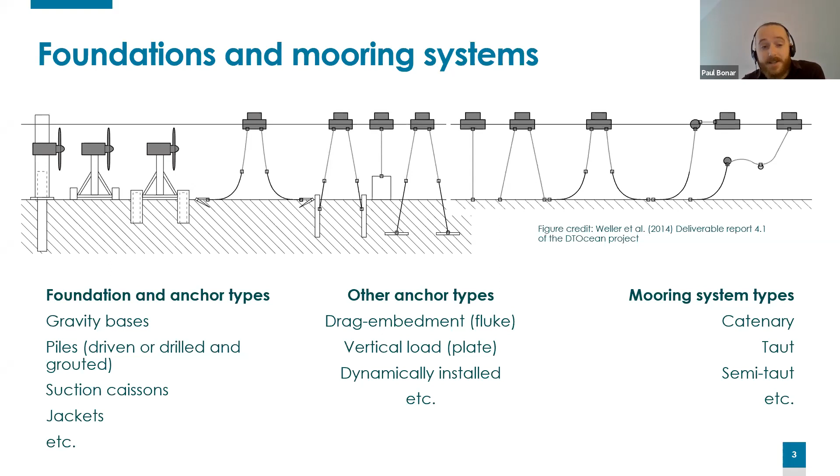The choice of station keeping system depends on the characteristics of the structure and the deployment location. But the idea is that each system will be designed to secure the structure or device in a way that's reliable and cost effective. That being said, most marine energy devices have been secured with heavy gravity bases because at demonstration stage, designers typically favor simplicity and reliability over cost efficiency.

Now let's have a look at some of the key challenges in designing foundations and moorings for marine energy devices. I'm sure you can all think of some, but the first one that comes to my mind is the marine environment, which is extremely challenging for both engineering design and marine operations. For marine energy, we're often targeting some of the most extreme environments, and we're doing so with new types of technology and limited operational experience, all of which can introduce risk and increase cost.

With these sorts of challenges, it makes sense to try and learn as much as we can from the offshore oil and gas sectors, which have decades worth of experience in securing structures to the seabed. As TJ mentioned earlier, oil and gas standards have proven a useful starting point for marine energy, but their priorities are quite different. I know my colleague Kate will touch on this in her talk as well, but I just wanted to introduce some of these key differences.

In oil and gas, the structures are usually much larger, they have crew working on them, and they generate so much revenue that the cost of a station keeping system is proportionally very small. For marine energy devices, on the other hand, they're usually much smaller, they're unmanned generally, and instead of having a single high value asset, you might have arrays of devices, each with their own substructure, and so the foundation and mooring costs could be proportionally much higher.

Marine energy devices might also have longer design lives. They can be subject to more complex loading. And rather than keep the device still, the moorings might be required to allow it to move in certain ways and by certain amounts as it generates power.

Some of the other challenges include the fact that there is no consensus as to the best type of marine energy device. At one time, there may have been an expectation that one particular type would be by far the most successful, but the view now is that there could be a number of different devices to choose from depending on the situation. Wave devices come in many different forms, as we know.

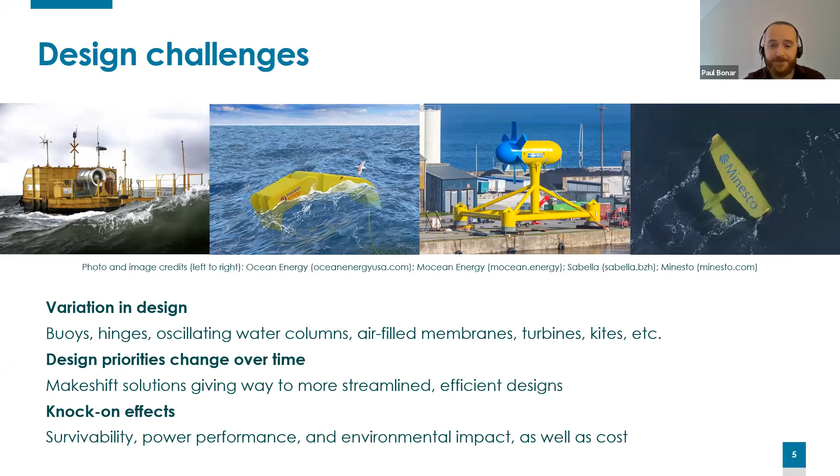With all these challenges, you might wonder how the marine energy industries are planning to proceed. Experts recommend a learning by doing approach, where good practices are adopted from other sectors, bespoke methods and tools are developed, and experiences are documented and shared. It's on these bespoke methods and tools that the SELKIE project comes in. Our project is developing open source methods and tools in key technology areas to support the marine energy industries, and also providing networking opportunities for SMEs and supply chain companies.

For station keeping systems, the key challenge at the moment is cost. Foundations and moorings are often quoted as representing between 10 and 30% of the installed cost for marine energy, but any additional cost or saving also has knock-on effects for installation, O&M, and so on. So as you can imagine, there's been a lot of research activity in this area.

These projects have really set the standard for open source decision support tools for marine energy. We're in a good position to learn from them because their second project is beginning to wind down just as ours is starting to spin up. My colleague Majid will give some more detail on the DTOcean tool in just a few minutes, but I wanted to briefly introduce how it works.

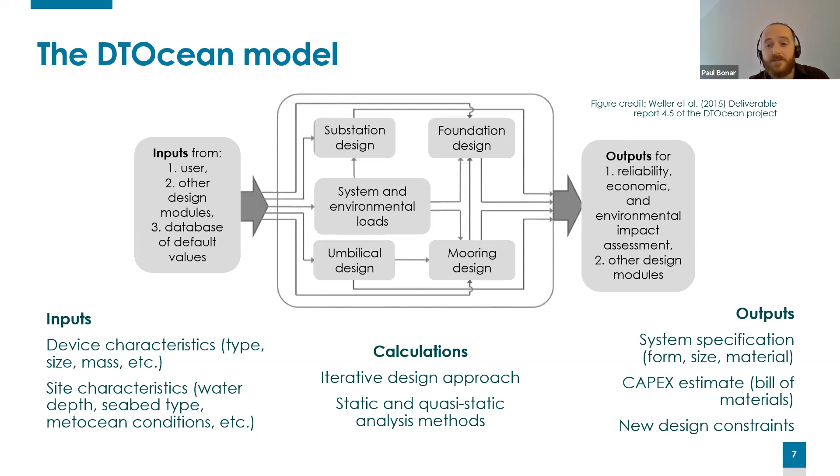First and most important, we've got usability. Making the tool simple and intuitive to use is obviously key, and we think that a link to the web-based GIS tool that our partners at UCC are developing, the one that TJ mentioned earlier, could be really helpful for us.

Flexibility is important too. We'd like to ensure that our tool can be used for different technologies at different levels of complexity and allow users some flexibility in the design to play around with safety factors and that kind of thing. Transparency is also key.

If we're going to suggest that one particular system type is best, we'd like to be able to show our work and give our users the final say on that. Compatibility as well - like DTOcean, we want to ensure that the outputs from our tool can be taken and plugged into other design tools. And then finally, we've got enhancement - where possible, we're going to try and include the latest technologies and methods to give the user the benefit of some more recent advances in station keeping system design.

We've also included some of the key questions in the Menti survey that TJ has shared. So we want to know which industries and sectors you're working in, which design software you use, if your methods already include open source tools, and if so, which ones. If you use the DTOcean tools specifically, and also what you think will be the next big innovations in foundation and mooring design.

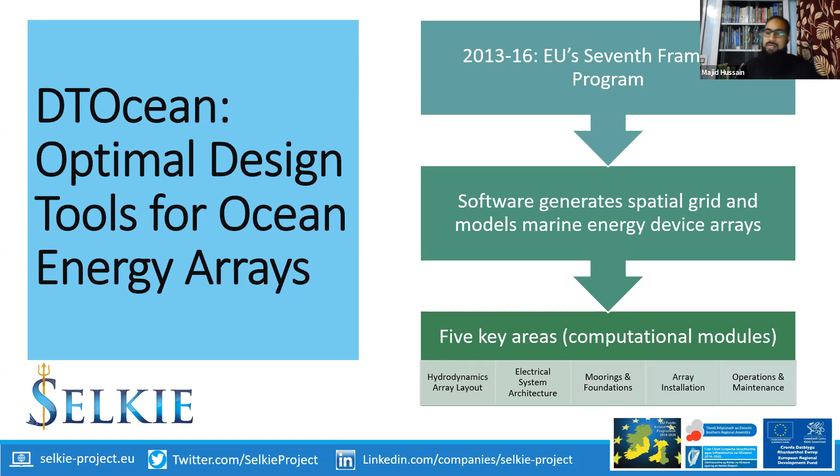So there are basically 5 key computational areas. One is hydrodynamics, then we have electrical system architecture, then we have moorings and foundations, which we'll be discussing in this part, then array installation and O&M.

Now, if we look at DTOcean, after a set of inputs - which is based on the technology type, deployment location, and also on the user-defined inputs - the output or the assessment that comes out is basically in terms of economics, reliability, and environmental impact assessment.

So if we look at work package 4 of DTOcean, which was concerned with moorings and foundation design, the set of inputs that goes into the software includes user-defined inputs and also inputs from the other packages. From these packages, the output serves as an input to work package 4, including array layout, umbilical modules, and also inputs from the global tool database.

Within work package 5, the capital cost, installation, operation, and maintenance are minimized. After minimizing that, the reliability of the solution is computed, calculated from the component failure rates. When that passes, then we have the environmental impact assessment.

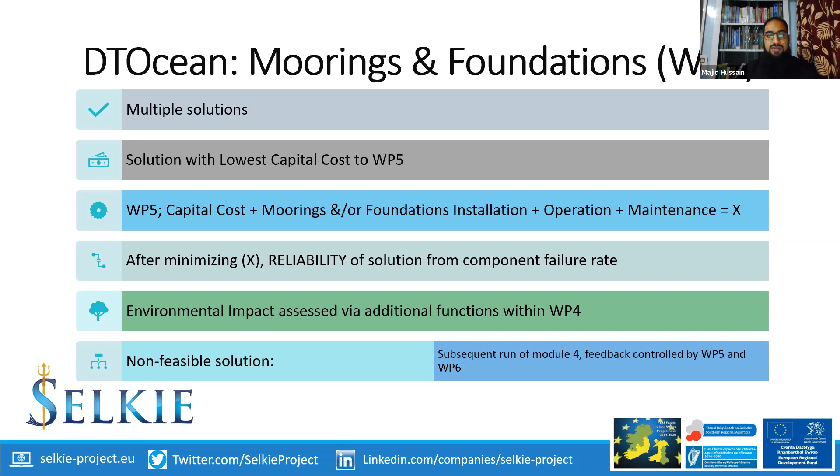Now if we look at the high-level data flow within work package 4, we can see the inputs coming from the user, and also from other work packages and the database. Then it goes within the submodules - actually 5 submodules are interlinked there. After processing, depending on the technology type and the seabed conditions, we have output in terms of economics, reliability, and environmental impact.

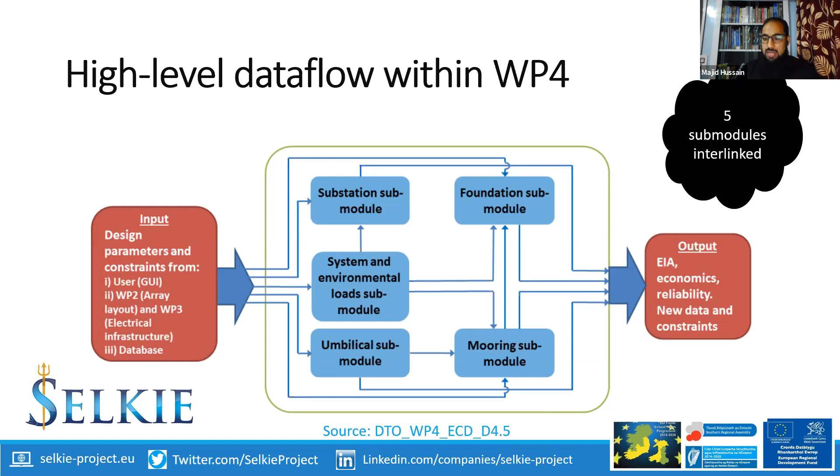Now we have two types of systems. One, if we look at the floating system, we can see the output from the loading, that is system and environmental, is stopped from going into the foundation module because it is floating. So it will be mostly mooring lines anchored to the seabed. From the mooring lines, the loads go to the foundation submodule to design or identify what type of anchors will be used.

Now if we look at the fixed system, the foundation submodule comes into action, particularly taking input from the substation module, also system and environmental loads. In this case, the output can be pile or caisson, but the main output from work package 4 and overall DTOcean will be economics, reliability, and environmental impact.

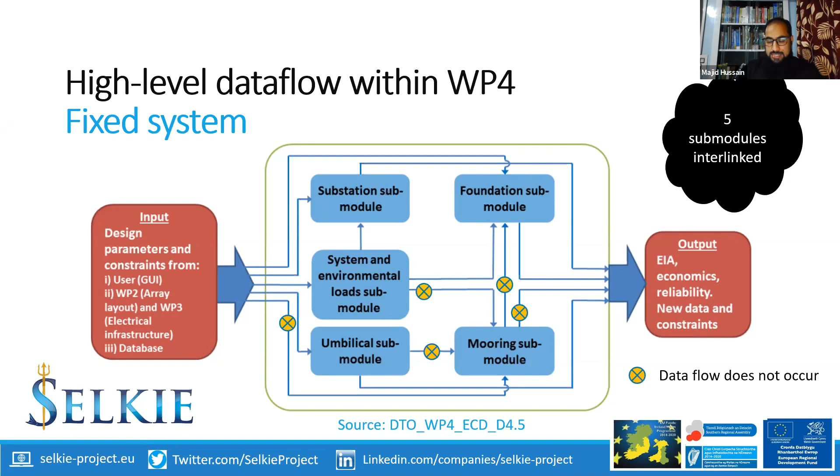Now if we look at the standards and methods that have been considered by DTOcean, they are pretty much the same as for all offshore devices or structures. The limit states considered by DTOcean are ultimate limit state and accidental limit state only. Maybe in DTOcean Plus, which is coming next year, they will take the dynamic part into account also.

Regarding the uncertainty of the materials and loads, that has been taken care of by the safety level or safety factor. It depends on the risk or effect that a failure entails. So if the failure produces a very high risk, like to the life of the operators or something, then we have to keep the safety level high.

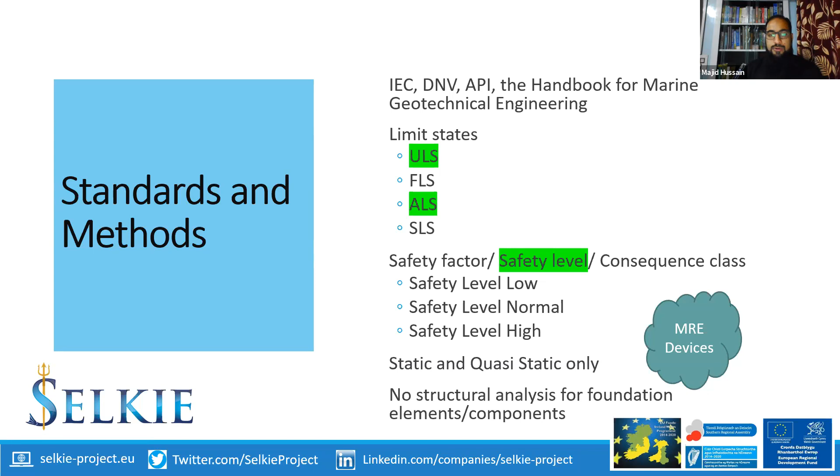Regarding the analysis, as Paul was mentioning, it will be static and quasi-static only. There is no dynamic analysis, which would include frequency domain and time domain analysis. Also, after the output, there is no structural analysis for foundation elements or components in DTOcean. Maybe there will be something in DTOcean Plus.

Now if we look at the DTOcean output, for work package 4 it is basically configuration hierarchy and configuration bill of materials. This goes as an input to work package 5 to plan the logistics, and work package 6 to plan the reliability.

So the overall solution will be refined further by work package 5 and work package 6. And after that, the final assessment we will have in terms of LCOE, reliability, and environmental impact.

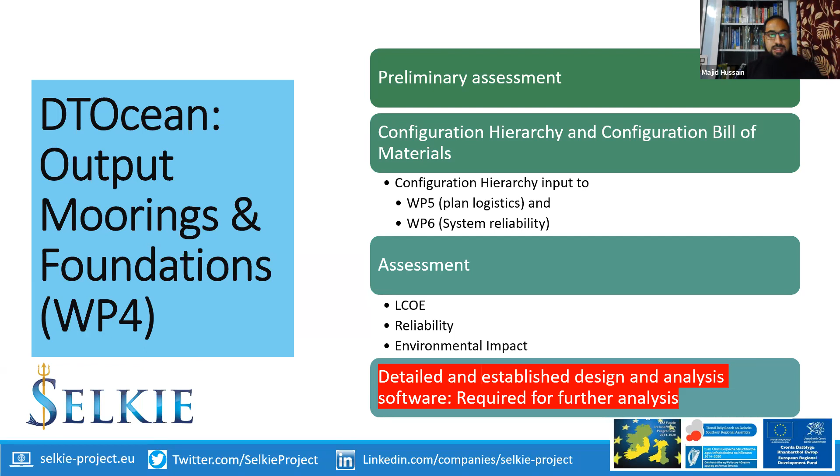For this, there are many commercial softwares available, and we'll discuss here SESAM, though there are others like Abaqus as well. SESAM has been there for pretty much time, around 60 years now. It was actually designed for the hydrodynamic and structural analysis of ships and other offshore structures.

In SESAM, the simulations are done in a highly relatable environment, where analysis during conceptual design involves natural frequency analysis, as well as ultimate limit state, serviceability limit state, and fatigue limit state.

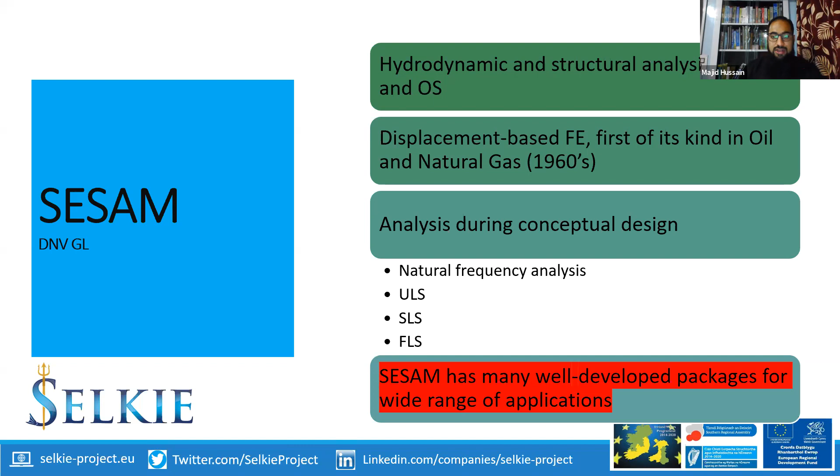SESAM has developed over the past 60 years with experience, and as you can see it's updated every now and then, and it has well-developed packages for a wide range of applications.

So there is SESAM for offshore wind, for floating structures, and to our particular interest for work package 5 in our SELKIE project, that is for moorings and foundations. We have SESAM for mooring and risers, and then there's a SESAM module for floating offshore wind turbines.

SESAM for mooring and risers has further subtools within it that do different tasks, like DeepC is there, FE Corrosion, which takes care of the corrosion of the mooring lines or other components, and SIMA is there. So there are many subtools within the system for moorings and risers that do analysis for different tasks and give us an output.

So this is a very high level introduction to this, and many details can be found at www.dnvgl.com, so you can go there. For our work package 5 of the SELKIE project, what we'll be doing is building upon these tools to make them more simple, more reliable, and web-based for us. Thank you.

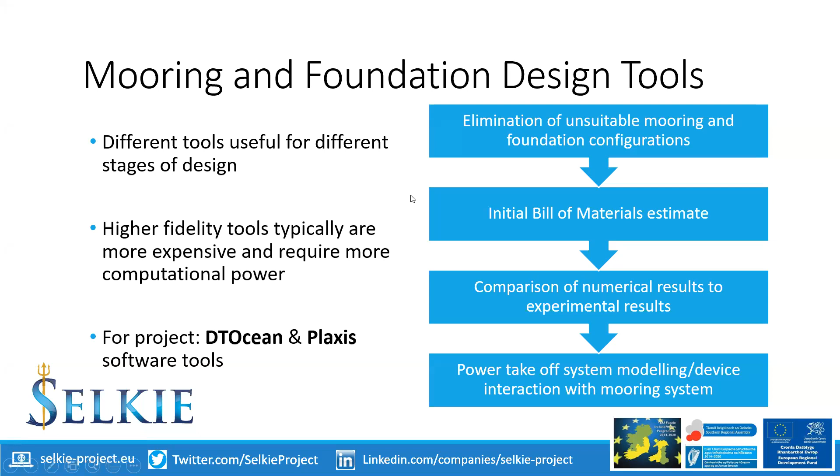I'm personally using DTOcean at the moment and finding it very good for a preliminary design stage. I also plan on using Plaxis analysis software in the future to do some further modeling. So that's where I'm going to finish up.

I hope I gave a bit of an overview on how current procedures outlined in design guidance can possibly be improved and need to be made more relevant to wave and tidal mooring and foundation design.

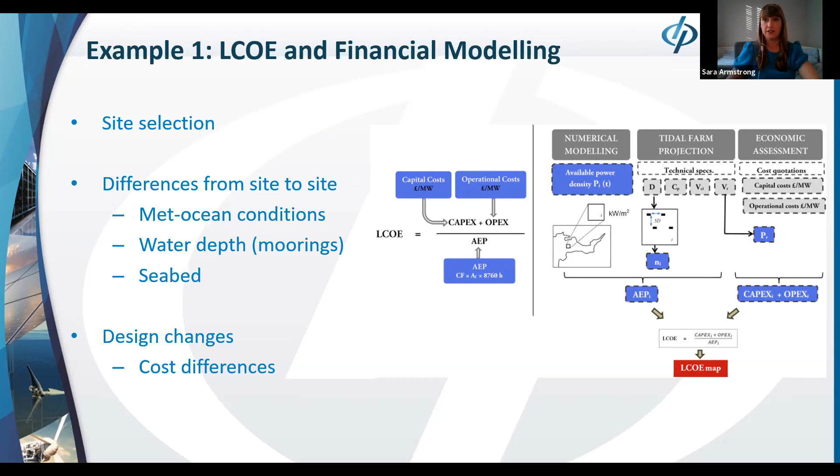Another thing we're really interested in is seeing the differences in the design of the moorings or foundations as you move from site to site. We'd like to see what effect the met-ocean conditions have, what effect the water depth has, looking at the seabed, what happens when you have different substrates and geologies, what difference that makes on the designs, and subsequently what effect that will have on the costs and the bottom line.

Last year we had our climate action plan, and more recently the programme for government. They've outlined plans for 5 gigawatts of offshore wind by 2030, and further plans to capitalise on 30 gigawatts potential off the Atlantic. So wave and tidal energy projects are going to have to coexist with other renewable energy types, but also with other marine users and stakeholders like the leisure industry and commercial fisheries.

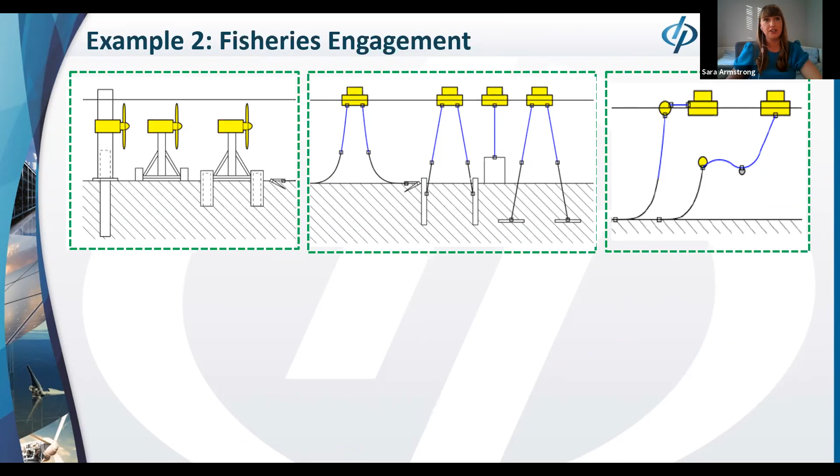Conversations with fisheries is something we do for all our marine projects, generally at a very early stage. Fisheries actually have a number of concerns relating to marine renewable energy projects, and their impression of the marine renewable sector is really heavily influenced by their past engagements with the oil and gas industry and how that engagement was carried out. So they are a little bit wary.

Another concern they have is in terms of exclusion zones and marine protected areas, where areas will be designated for renewable energy projects, because obviously they won't be able to fish in those zones. If you're making your livelihood from fishing, that's going to be a major concern. Another area they think is a risk is the snagging possibilities and gear entanglement. They have this concern for all types of marine energy devices - wind, wave and tidal - but it's obviously a greater concern for floating devices and devices with moorings.

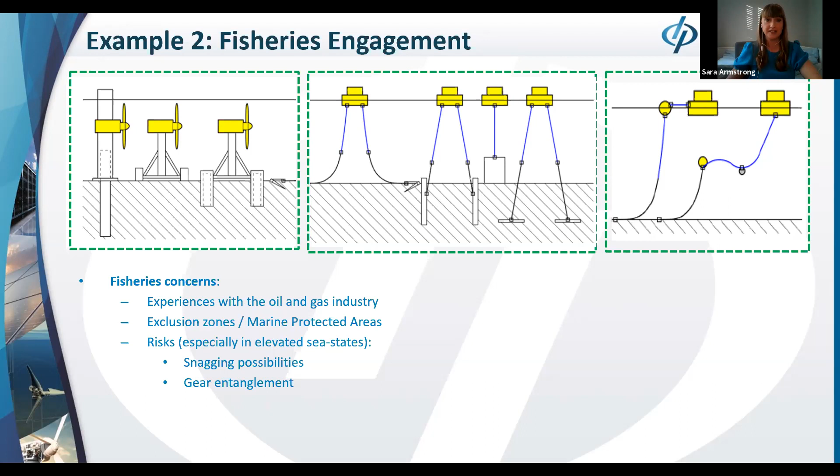These are some of the key questions that fishers tend to ask us when we meet with them at an early stage. They want to know what the overall project area is going to be, what the spacing is between devices, what the mooring spread is, how much it spreads out. In terms of anchors and anchor burials, they want to know how deep the anchor is, how much of the mooring chain is going to be submerged subsea, and they want to know about the structure footprint and the overall project area footprint.

So there are some definite key areas that we'd love to see as an output coming out of the SELKIE FNM tool.

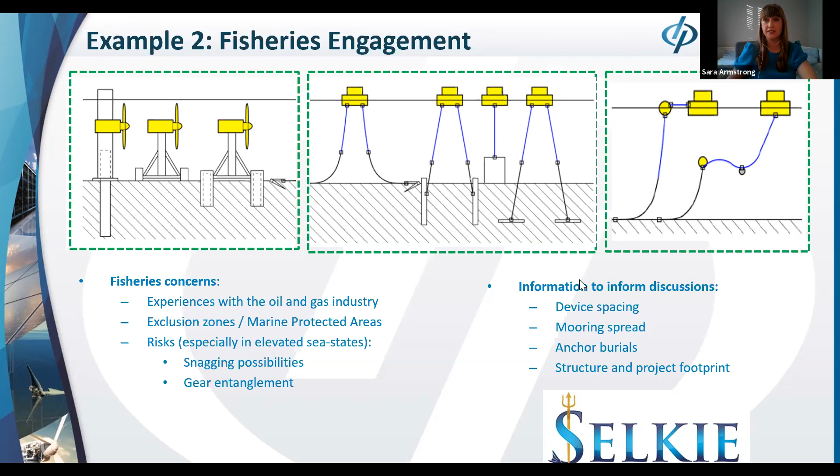The third and final example of functionality we would really welcome within the FNM tool is related to device placements on the seabed and subsequent loadings on the device. This picture here shows our Uisce Tapa site.

One of the issues with placing your device is that you want to find the best location within your investigation area. Firstly, you want to optimize your energy yield, so you want to place your device perpendicular to the tidal flow. Secondly, you want to account for all obstacles and constraints in the area - if you have any issues with bathymetry, or any existing cables or pipelines, you have to avoid those. Finally, you want to find an area with a suitably level seabed.

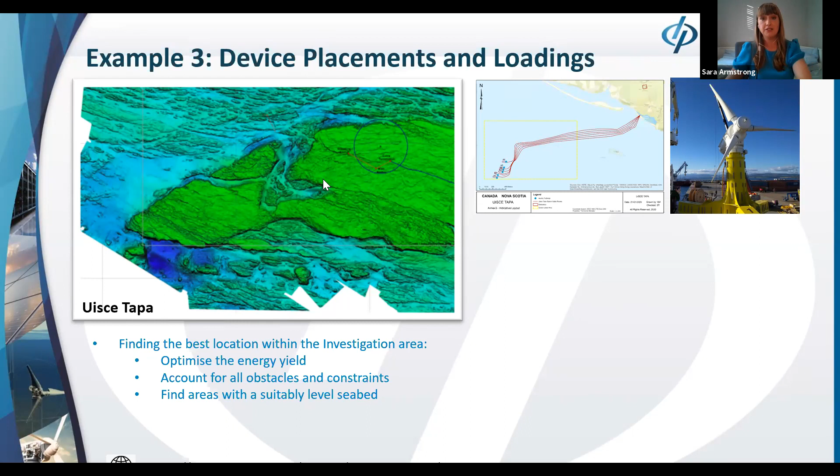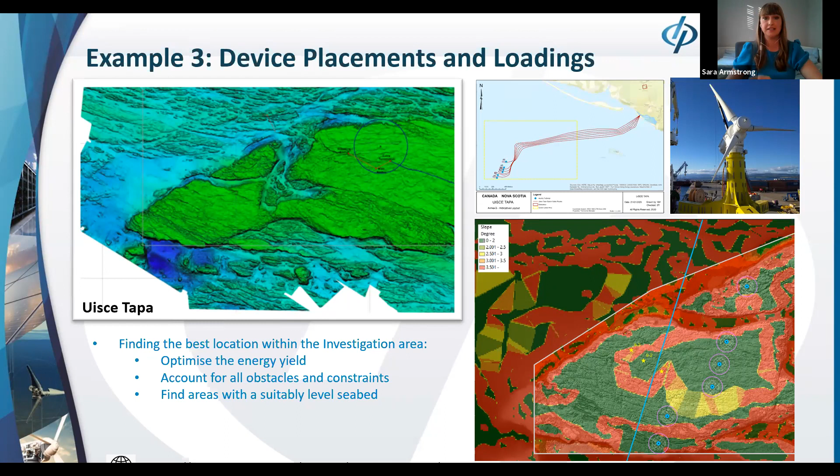Depending on the site, it's actually quite difficult to find an area that meets all the requirements for every single leg of your device - obviously a device has three legs - so sometimes you just have to make do with a bit of slope on your seabed. At the moment we've taken an iterative approach to how we look at device loadings and device placement with our device developer, but we think it would be a really useful feature in the SELKIE FNM tool if they were able to look at seabed slope and subsequent loading analysis.

Okay, yeah, and that's pretty much it for me. I just wanted to give a flavor of how we would use the FNM tool from the perspective of a project developer, because obviously we have very different needs and requirements than a device developer.

Thanks very much, thank you very much for that input. Great to hear some of the things you take into consideration there that wouldn't necessarily be brought up when looking at things on the device scale. Quite interesting to hear about your ongoing discussions with fisheries there.

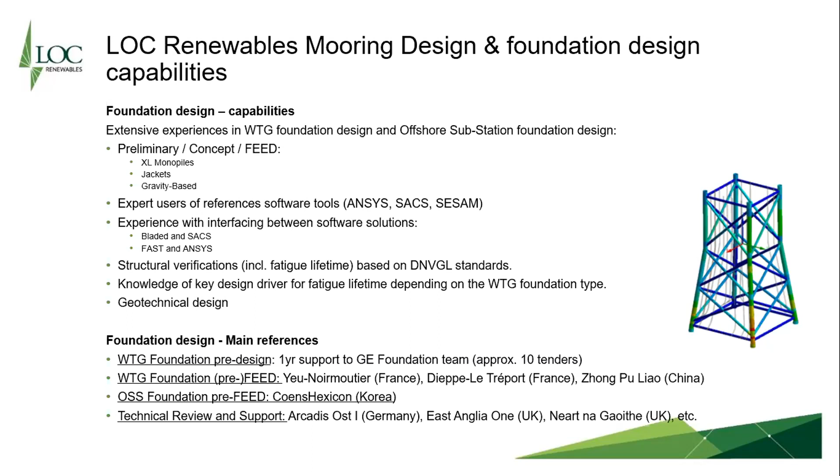As I said, during the last years we realized there was a need for an in-house tool for the preliminary stages of design. The idea is to have very quickly geometry for foundation design, so in the end we can have the material takeoff and bill of quantities for a type of foundation.

So we developed this tool mostly for offshore wind. You can consider a jacket foundation or monopile foundation within the tool, and you can have natural frequency analysis, ULS and FLS code checks included as well. We developed lately a module that enables us to retrieve the pile deflections for monopiles in particular. This tool is developed in Python and includes a graphical user interface, which makes it user-friendly. I won't talk more about the tool itself since it was dedicated to offshore wind.

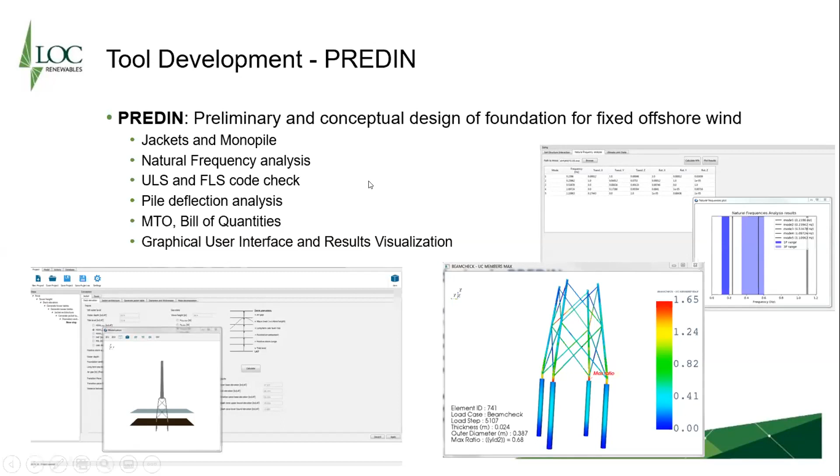What I would like to do is share with you two feedbacks that we think are interesting to share, because even though it's feedback for offshore wind, I think it's fully applicable to any type of foundation, especially tidal.

The first feedback is that depending on the type of foundation, you don't have the same design drivers, so the design process can be totally different. To illustrate this, I'll compare monopile and jacket. For monopiles, the design driver is mostly inertial loads, natural frequencies, and dynamic response, especially for large turbines. This means at the early stage of design, it's necessary to perform an integrated load assessment considering aeroelastic loads at turbine level, which is not necessary at an early stage for jacket design. As the jacket is a more rigid foundation, inertial loads have less impact, and you can just focus on wind loads at the interface between tower and foundation. So it's not the same - the design process is different.

Another interesting comparison is the soil data. For monopile, you need to focus on lateral soil capacity, which has a huge impact on the stiffness of the whole system, whereas for jacket design you should focus more on axial soil capacity. So again, two different design drivers, two different types of input data required. One last thing to mention is that jacket is a more complex geometry, so you need to keep in mind the constructability of the structure throughout the design stages, which is not obviously the case for monopile, as it's a simpler structure.

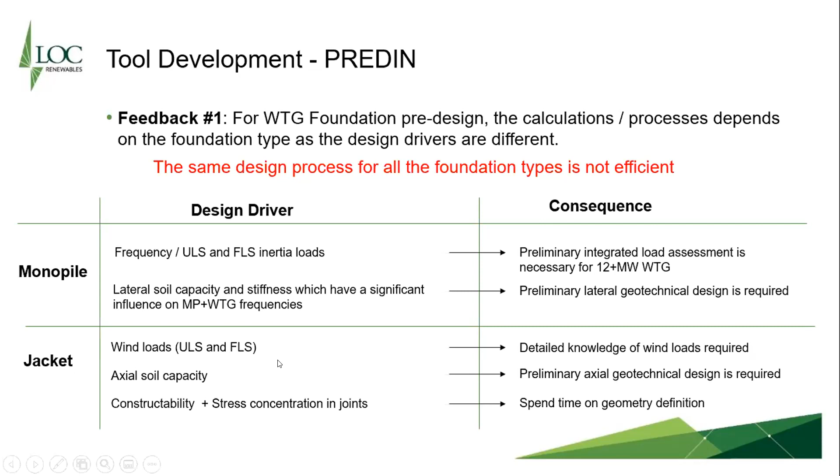The second feedback is that when performing foundation design, you need to find a good balance between the flexibility of your tool and the automation that everyone dreams of. I mean, initially when we developed our tool, we thought we would make something fully automated - you just give a few input data, click one button, and it directly optimizes your foundation. But we realized that was first not possible, and then not the best way forward.

You still need flexibility, due to the fact that all projects are different, input data isn't necessarily the same for all projects, and it's not the same design load cases. For all these reasons, you want flexibility in your tools. I think with PREDIN we managed to achieve this flexibility, as we work with modules that are articulated with each other, and you can develop new modules if necessary. There are also some modules already automated for tasks that are quite repetitive and don't require as much engineering skill.

So this is a compromise we had with PREDIN. An example of this is that we initially developed PREDIN for offshore wind foundations, but we used it to perform the detailed design of a tidal turbine that is now on site in North Brittany, in Paimpol. It's a 1 megawatt turbine, and the foundation was designed by PREDIN. This is an example of how we adapted our tool to another type of foundation.

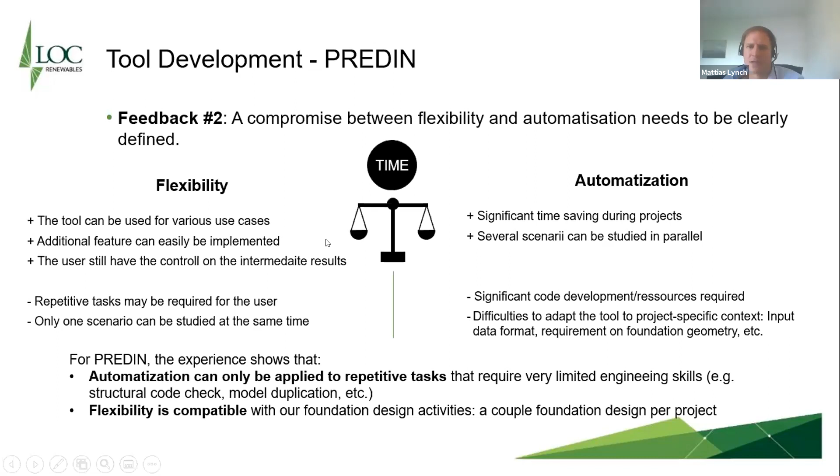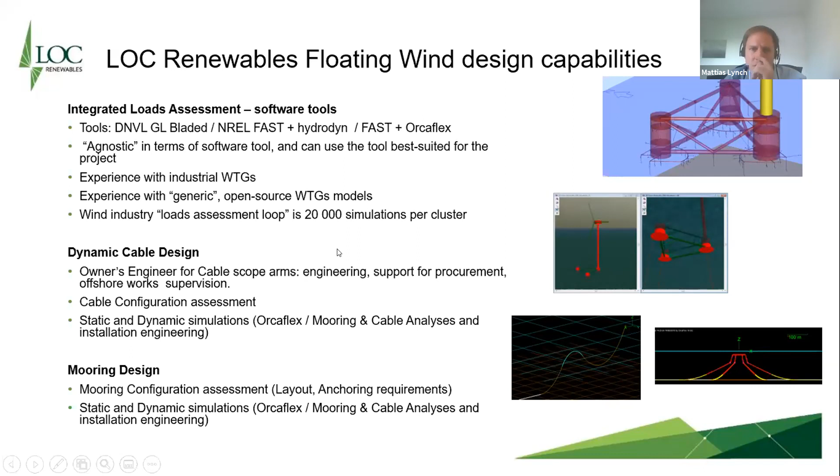Some of the pictures are extracted from Orcaflex here. The tool we developed related to these capabilities is called Stationis. This is developed within a consortium of 4 French companies. There's a website if you want more details. It's a pre-design software for subsea architecture with focus on mooring, cable, inter-array cables, and dynamic cables. The idea is for the pre-design phase, so it can be during tender stage or preliminary design phases where you want to compare the impact of several floater designs. The aim is to design the electrical architecture, the mooring architecture, and the associated equipment - in this case, the anchors.

Then you have an automatic extract of technical reports and drawings. The main target is to compare different solutions - you can check for different floaters, for example, and make comparisons for different materials within the mooring system. Then you have a set of cost indicators, KPIs, and risk indicators. There's a database within the software, and you can add your own. The aim is to compare all these solutions and move along in more detail with the ones which seem more relevant from a cost and technical perspective.

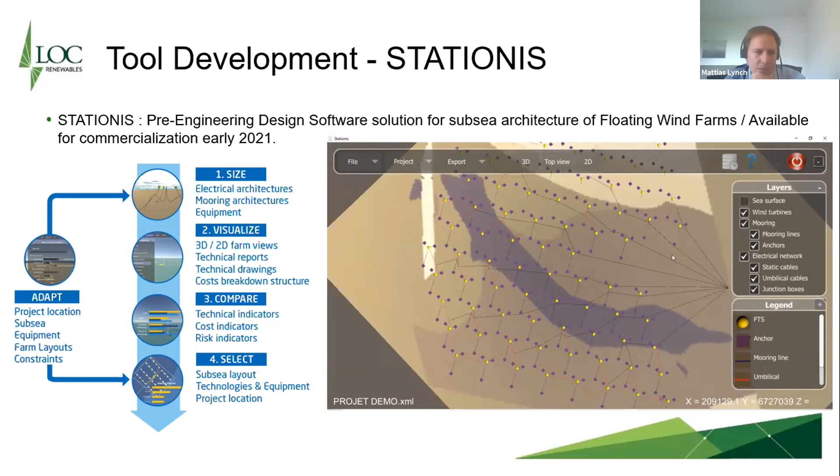There's a frequency domain motion solver that gets the motions of the floater, including aerodynamic impact. Then it's coupled to MAP++ - as mentioned before, it's a quasi-static mooring solver. From that it extracts the tension within the mooring lines. Then there's a specific solver for the dynamic cable configuration. Based on the loads and the soil conditions, you can assess anchor options.

So in the end you have several stages. First it generates all your load cases, then it generates the mooring configurations - you can check several mooring designs and compare them. Then it generates the wind farm, with the inter-array cabling and the electrical network associated to it. And then you have the KPIs for your comparison.

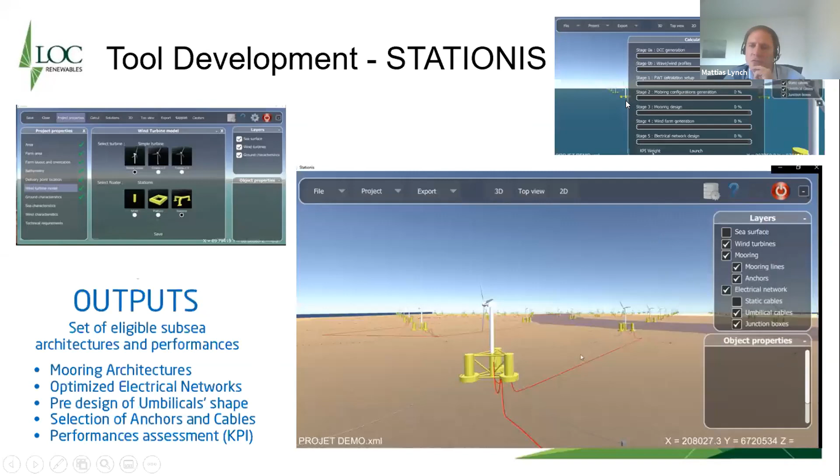That's it on my side. It was a quick overview, but if you have any questions, don't hesitate to contact me, Mattias, and Pierre.